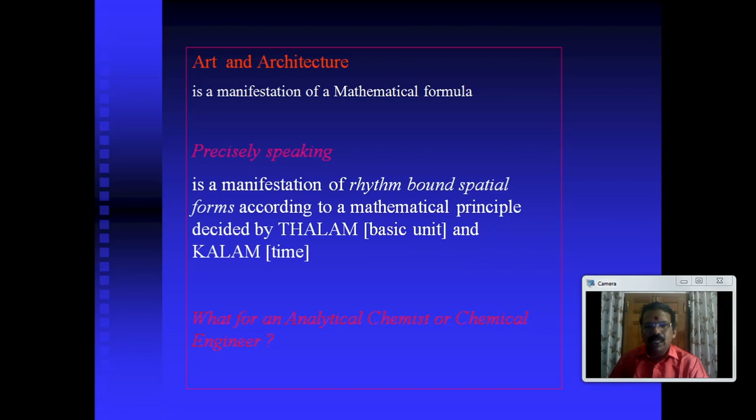So what is the significance of mathematical models for analytical chemists and chemical engineers? Deep knowledge of analytical chemistry and chemical engineering principles is very important to work as a professional environmental scientist. Chemists and chemical engineers are really accompanying artists or interpreters of a chain of activities, concerted reactions. So you environmental scientist, basically you must know the principles of chemistry and engineering.

Here you are particularly concerned with the science of atoms and molecules and their dynamics in three-dimensional space, designated as reactants and substrate, and how they follow mathematical rules in the course of a process so that the substrates are converted into the products. Chemical process is a manifestation of a mathematical formula decided by nature.

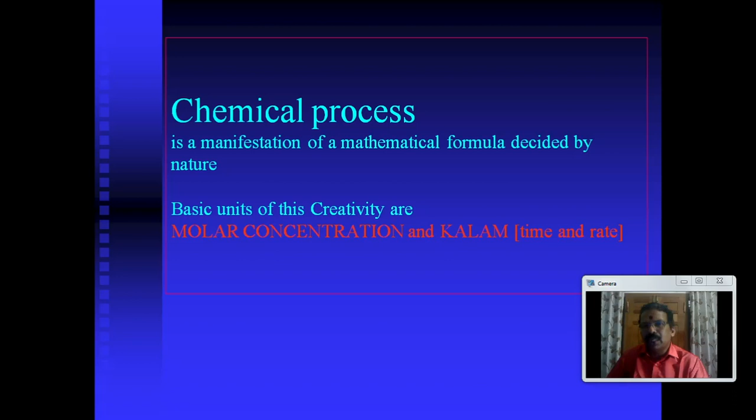I have mentioned that the basic units of a chemical reaction, the basic units of chemical creativity or molecular creativity or molecular transformation or transfer phenomena, are decided by molar concentration and time, the time and the rate of the reactions. Based upon this knowledge, that again highlights that each and every process can be an expression of a mathematical formula.

Will you please model the following thing? Yourself as a good teacher. A good teacher in the area of environmental science, I have mentioned, needs deep understanding of the principles of physics, chemistry, engineering, mathematics, and statistics. Of course, knowledge of the computer.

So, to become an ideal environmental engineer, environmental scientist, or environmental teacher, you must have a basic understanding of the mathematical rules. Similarly, for a bird flying in the sky, the aerodynamics controls the flight of the bird. The buoyancy of the air, the principles of mechanics, the principles of motion, everything is involved, simply for a bird to fly in the open sky.

A reactor, we elaborately discussed earlier the functioning of a reactor, comes to the point of a riverine system. Even a riverine system is a manifestation of mathematical formulas decided by a combination of tank reactors and tubular reactors. A river means a chain of tank reactors and tubular reactors decided by the average flow rate of the river, the dissolved concentration of the components, mostly dissolved oxygen concentration, dissolved substrate concentration, and whatever you have studied in your environmental

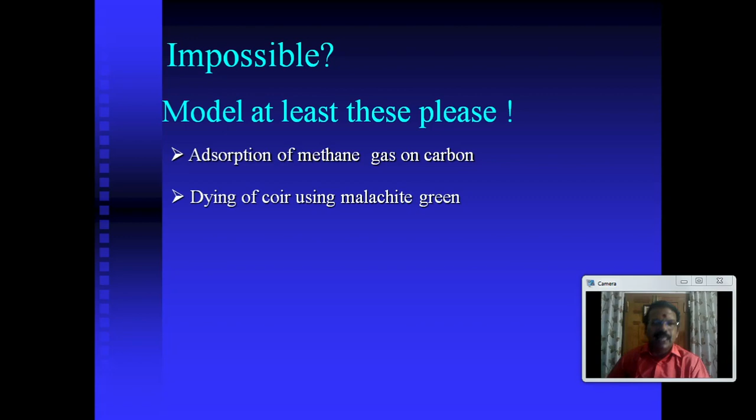Dyeing coir using malachite green is a reaction where dye is applied to a natural fiber. Formation of the water molecule, a simple reaction we have studied from our early school days. For the formation of the water molecule, we write 2H2 plus O2 gives 2H2O. In water, we write the balanced equation: water H2O plus CO2 gives carbonic acid H2CO3.

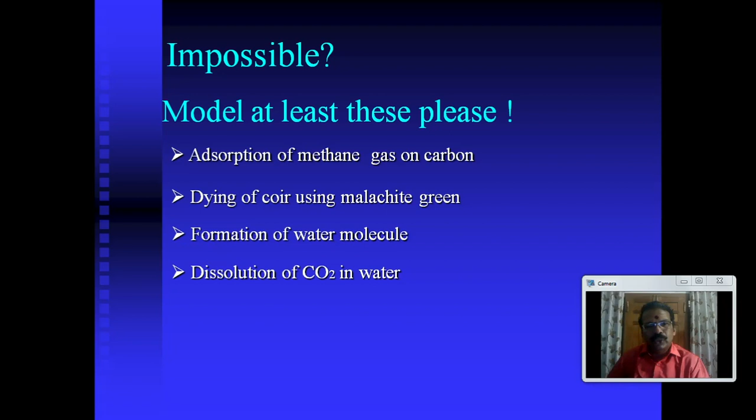In each reaction, mass balance is involved. We subject the chemical reaction to the principles of mass balance. See the reaction between hydrogen and oxygen so that water is generated. We can see how simple mathematics is involved. 2H2 plus O2 gives 2H2O. 2A plus B gives 2C. 2A plus B minus 2C is equal to 0.

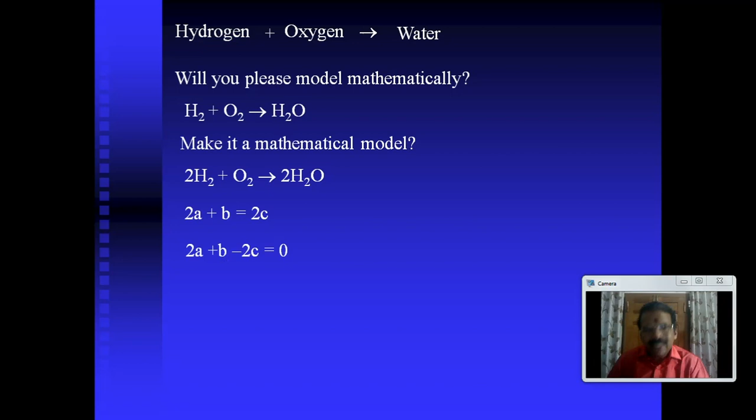You see, the entire geographical system, the functioning of the natural environmental system, can be represented in the form of a simple tank reactor. I have mentioned from the very beginning, each and every process can be represented in the form of a tank reactor or a tubular reactor. We will study later how this entire system connecting rivers and lakes can be expressed in the form of a simple mathematical relationship and a combination of tank reactors.

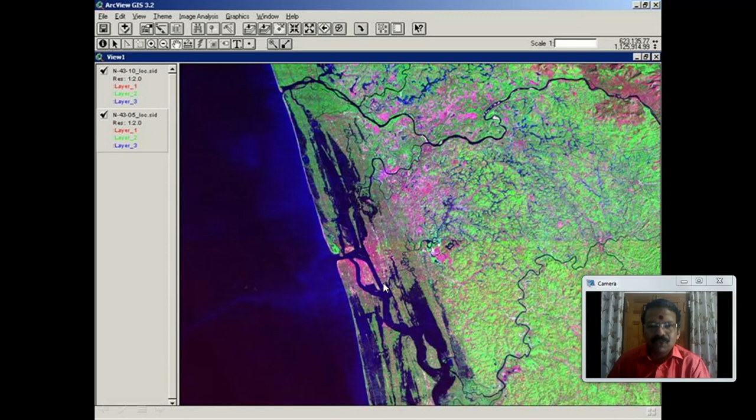The severity of the tsunami is decided by what level the wave front reached in the mainland. That length is taken as inundation distance. Based upon the inundation distance, the coastal areas can be demarcated as tsunami prone areas and tsunami sensitive areas. So the height of the tsunami waves marked on some of the available objects and the distance of inundation are selected as the parameters. Accordingly, the predictions can be made.

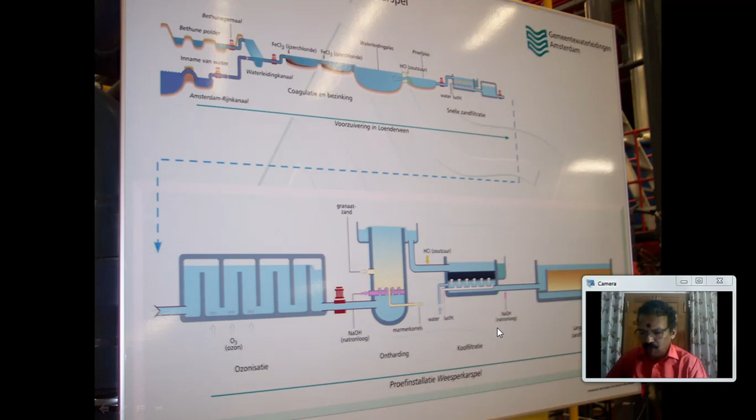You know, garnet sand is an ideal material for softening of the hard water. It can pick up calcium and magnesium, which can be deposited on its surface, and after the upflow tubular reactor filtration, the water will be softened. The softened water is neutralized, filtered through activated carbon filters and collected in a tank, and it is further subjected to slow sand filtration prior to distribution. So design and optimization of drinking water treatment plants is very important in modeling applications.

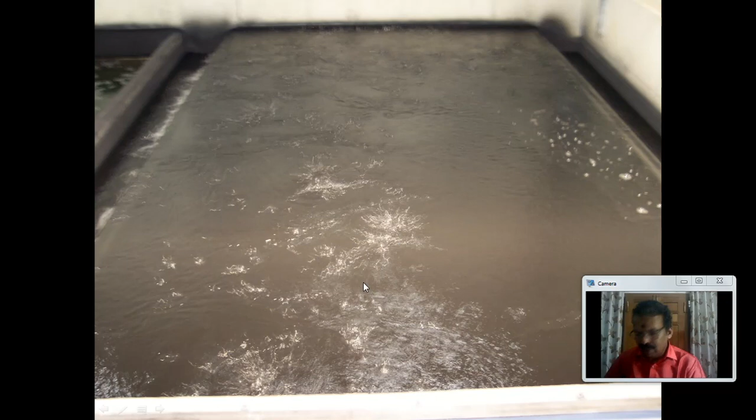So these are the close-up pictures of an upflow tubular reactor in a drinking water treatment plant. It's an activated carbon filtration unit where the monolayer adsorption capacity of the activated carbon decides how many cubic meters of contaminated water can be filtered by every 1 kilogram of the activated carbon. So adsorption theory and adsorption models are involved prior to the design of this activated carbon filtration system. An adsorbent material, an activated carbon, its surface area is determined, monolayer adsorption capacity is determined, then it is put into a model tubular reactor.

Water is allowed to filter through the carbon filter columns with a known designated flow rate with a dissolved substrate concentration over a period of time till its capacity is exhausted. From that, the specific purification capacity of the carbon is predicted accordingly for a huge treatment plant. If millions of cubic meters of water have to be purified, how many tons of activated carbon are required for a single operation can be decided. That kind of decision can be taken by people like you after studying these kinds of courses.

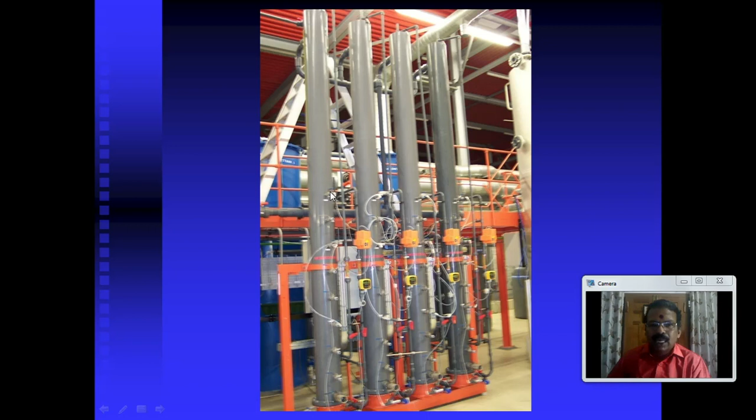So it is a sand filtration model, a sand filtration unit generally used in drinking water treatment plants. I have mentioned that activated carbon, such newly generated material, is tested in mini columns, then experimental tubular columns are filled with the material and water is allowed to flow, and its adsorption efficiency is tested before it is applied in large scale operations.

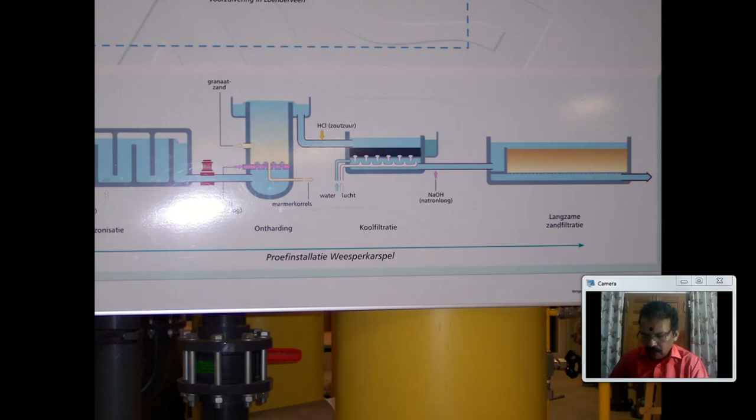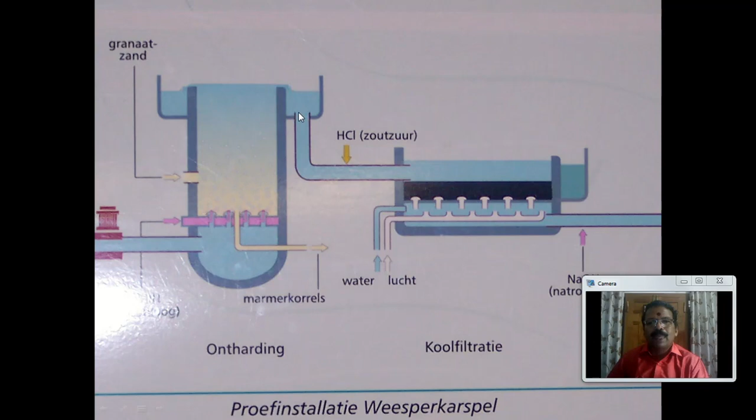So I have mentioned garnet sand is an ideal material for softening of the hard water. In the upflow tubular reactor, where hard water is treated, going to the previous slide, this is a tubular reactor filled with the garnet sand. The water having hardness providing ions, magnesium and calcium, is made alkaline, and it is allowed to flow into the upflow tubular reactor. Then calcium and magnesium are deposited, and the deposited calcium and magnesium can be retrieved. So after the filtration we get softened water, that is, hardness ions are removed.

We can say environmental modeling is a continuous scientific development where each process is designated as an expression of a mathematical formula. Environmental processes are complex interactions of nature. They can be defined in scientific and technical terms. Mass and energy balances are involved. Microbial population kinetics are described. Principles of thermodynamics are applied. Transport processes are scientifically described.

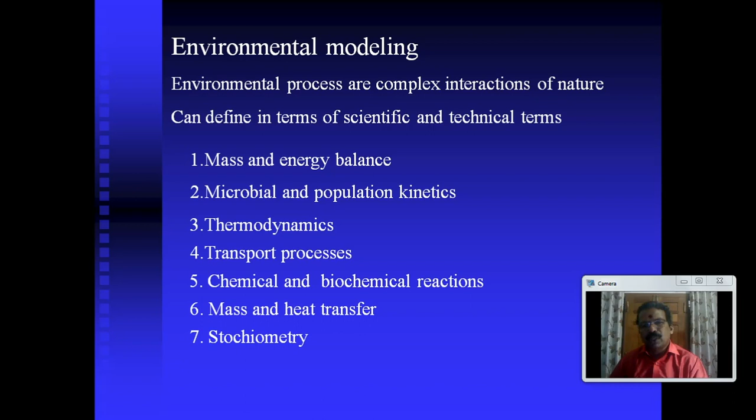Chemical and biochemical reactions are expressed in terms of kinetic relationships. Mass and heat energy and their transfer are expressed in physical terms. Stoichiometry of interaction can also be expressed in terms of simple mathematical relationships. Accordingly, major environmental processes, modeling of climate, modeling of geographic systems, modeling of natural disasters, and modeling of human interventions can be done using the principles of mathematical models. Of course, also design and optimization of wastewater treatment plants.

This is the end of the first talk and the beginning of the second lecture. In this lecture, we will go in depth regarding classification of environmental model systems and the study of adsorption isotherm models.